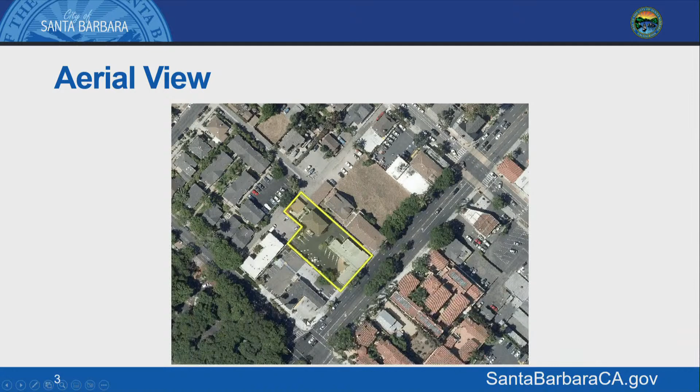You may recall that you had a concept review for the commuter lot proposal project. That's where these trees are located, and that's the commuter lot just recently. So this is a required concept review hearing. It's required because it is a rental housing project proposed under the average unit size density, or AUD, incentive program, and in the priority housing overlay area. It does not require any other discretionary approval by the Planning Commission, and it is on a lot that's greater than 15,000 square feet. The purpose of the hearing today is for the Planning Commission to provide comments and recommendations to the Historic Landmarks Commission regarding the proposed design and consistency with the general plan.

So the proposed project is using the AUD incentive program and also the state density bonus law provisions. Just a summary of the project: it would include relocating the existing residential building. Currently a triplex, it would be converted back to a duplex, so there'll be two 3-bedroom units as part of that relocated building. And then the construction of a new 4-story, 35-unit residential building with 4 studios, 19 one-bedroom units, and 12 two-bedroom units, and some low-income and moderate-income units as well, which we'll go over shortly.

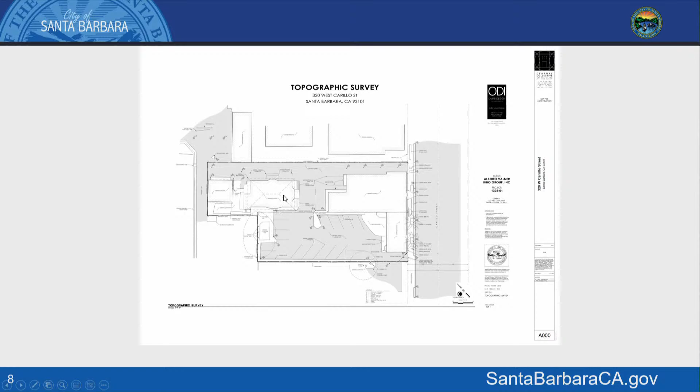Here is a survey of the existing project site. This is Carrillo Street on the right, the existing building to be removed in the front of the site. And right here is the existing residential building to be relocated to the front of the site.

Here is the proposed site plan on the left. It shows the structure of merit, historic resource here on this corner, some open space area, and then the 4-story building with a courtyard in between. It's one building, so you can go back and forth between these two areas, but there is an open space below.

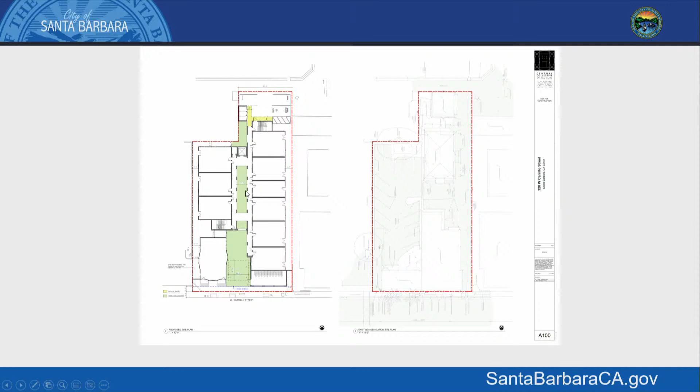So here are the floor plans. On the right is the ground level, showing in the front a bike parking storage room, and then the units. Along the back are 3 parking spaces and a trash enclosure.

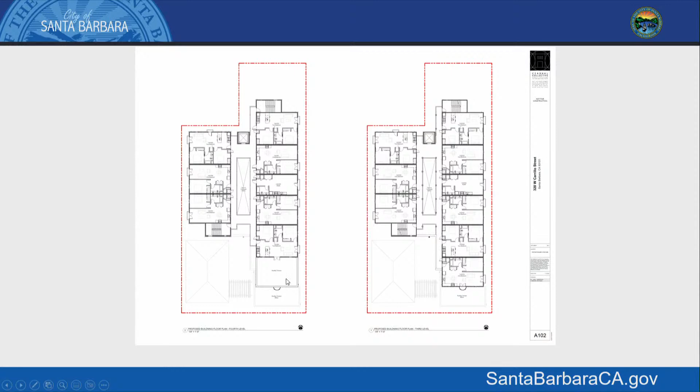To the left here is the second level, showing the residential units. Third level to the right, additional units, set back a little bit. There's a terrace here above the bike storage area. And then to the left, the 4th level, again another roof deck terrace area right here, and then the units behind.

Here are the elevations on the top, showing the proposed elevation looking from Carrillo Street. It shows the structure of merit located here on the left, and the new building to the right and beyond.

The proposed height is over 45 feet. It's 46 feet 10 and a half inches, so over the required height. Rather than asking for a height exemption request from you today, the applicant is using one of their incentives or concessions to request relief from the height requirement.

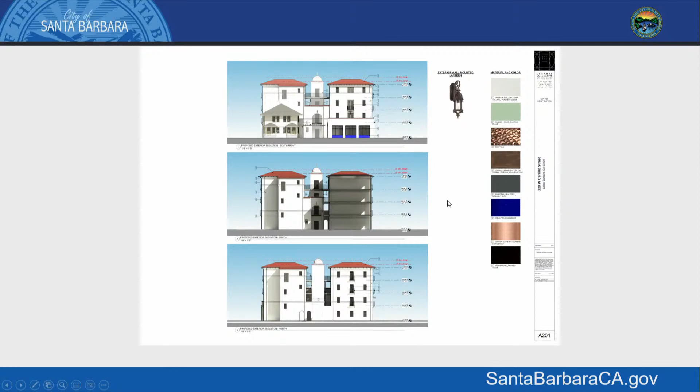Some additional elevations. The east side, so this would be looking from the downtown area towards the building, and then down below, looking from the freeway section to the project site.

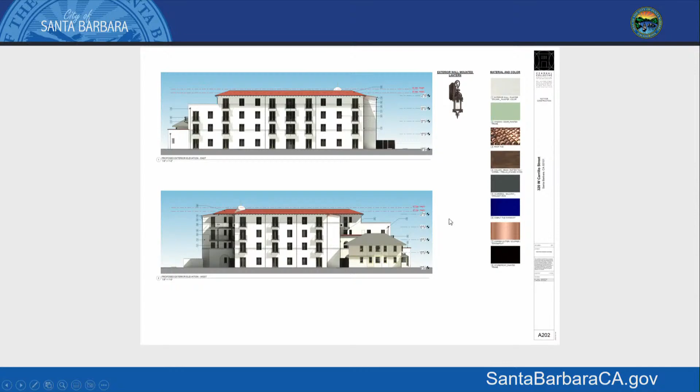The proposed landscape plan showing the courtyard and proposed plantings. There will be the removal of a few trees in the back of the site, but mostly lots of new plantings proposed.

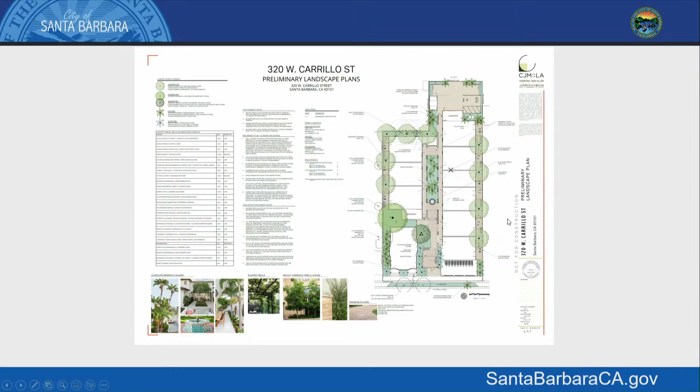Design review is required by the HLC. The project did go to the commission, and the commission stated that they appreciated the design of the new building, and they did support the height of over 45 feet. They suggested restudying some of the elements of the project to reduce the visual impact of the overall mass of the project.

Our architectural historian prepared a memo that was presented to the HLC, and the HLC concurred with the conclusion that the project meets the Secretary of the Interior standards, that the project will not have a negative impact on the historic building or the streetscape, and that it will restore historic integrity to the building by moving it to where it once was along West Carrillo Street. The existing residential building, which is in the back, had previously been located right up at the street, so it's being moved back to that original location.

Regarding zoning ordinance consistency for parking, it is exempt from providing parking under Assembly Bill 2097, although the project does include 3 parking spaces in the rear.

In regard to density, as I said, it's an AUD project and in the priority housing overlay area, so the maximum density is 63 dwelling units per acre, and that equals 25 units. The maximum average unit size is required to be 811 square feet, and the proposed for this project meets that by being 766 square feet.

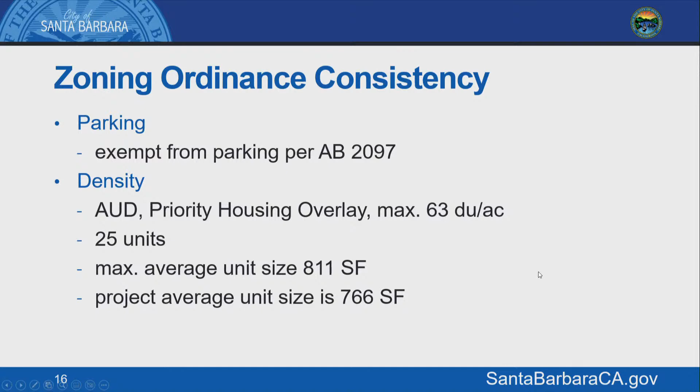The project also is taking advantage of state density bonus law. When we look at that, we determine what the base density is under that, and in this case it's 26 units. The project is providing 12% of those 26 units to be low-income units. That would be 1 studio unit and 3 one-bedroom units. 12% is 4 of the 26. So because they are providing that number, 12%, they're entitled to a density bonus of 38.75%, and that equates to 11 additional units. So they have a total of 37 residential units proposed.

They're also required to meet the inclusionary housing ordinance requirements by providing at least 10% of the units as moderate income units, and that would be 3 of the 26. You count just the original units, not the density bonus units. So 3 of the 26 would be moderate income - that would be 1 one-bedroom unit and 2 two-bedroom units.

As part of the state density bonus law, the applicant is allowed to seek relief from development standards. In this case, as proposed currently, they would have no setback for the buildings, so that would be one of the concessions they're asking for. Also, the building height being just over 45 feet, and also not providing the 15% of the lot area as open yard. They are close at 12%, but do not meet the 15%.

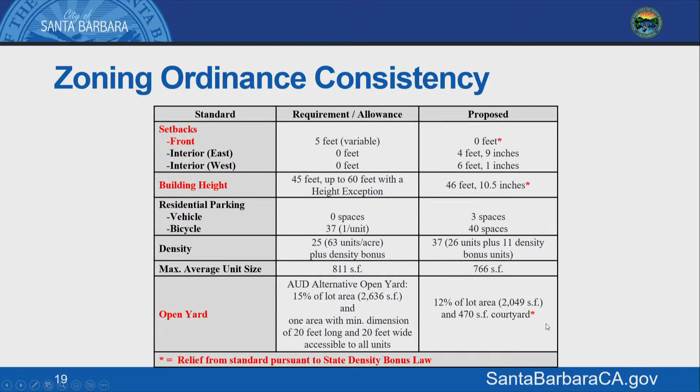In regard to public improvements, the project as currently designed does meet the current requirements by dedicating 5 feet to increase the size of the sidewalk. Over here to the left shows this line - they would dedicate this area for sidewalk, and then this would be the new property line. The proposed project is right at that property line, so there would be 0 setback, which is why I stated previously that they would be asking for relief from that 5-foot variable setback.

The pedestrian master plan will be created and put into the ordinance to have this as a requirement for projects where it isn't currently. So if this project were to meet the requirement of the pedestrian master plan, they would have to dedicate an additional 4 feet - that's where this pink line at the top would be.

If they were to ask for a waiver, transportation planning is not supportive of a waiver of this under state density bonus law, because they've determined that this would be more of a public safety issue and aren't supportive of that. In that case, this would have to be redesigned.

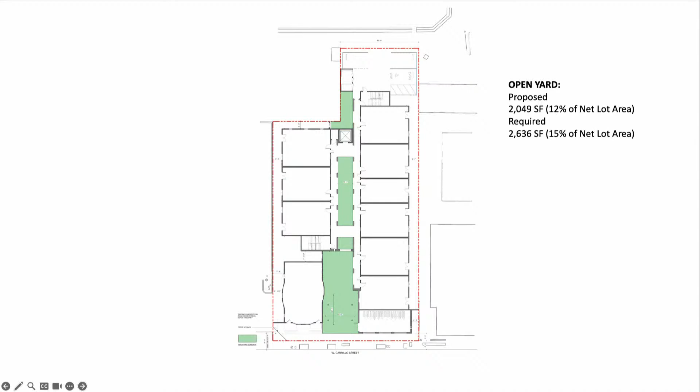We are a little short on the open yard area, and that's important, really primarily because we can't provide the private outdoor open space associated with the open yard requirements because the balconies just become too big, frankly. The landscape plan—I'll be happy to answer questions about this. We do have a large sycamore tree that we're planting here that will create that transition between the historic building and the new buildings and also mitigate the mass. The trees along the perimeter are also an important part of mitigating the mass of the 4 stories. Courtney Jane Miller is our landscape architect.

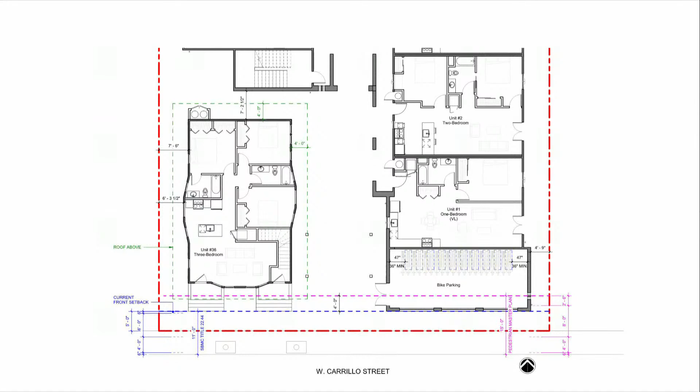Obviously, at this point, there are many buildings along Carrillo that are right at that red line, but nevertheless it's important to have future projects comply. But if there's a way that the steps can somehow encroach, that will help us. Otherwise, frankly, what we would have to do is remove or take a whole stack of 2-bedroom units and turn them into either 1-bedroom or studio units, which is our other option on this. I can explain that further if it doesn't make sense.

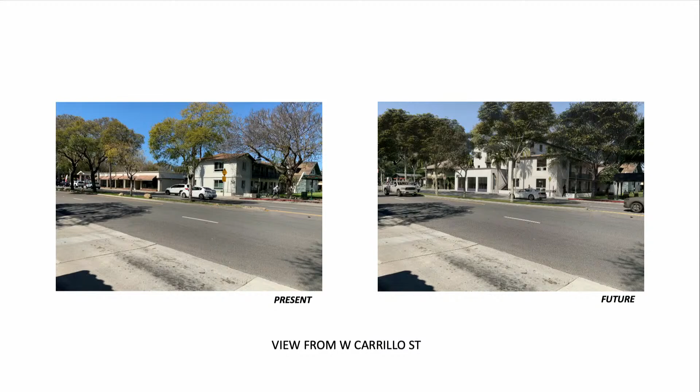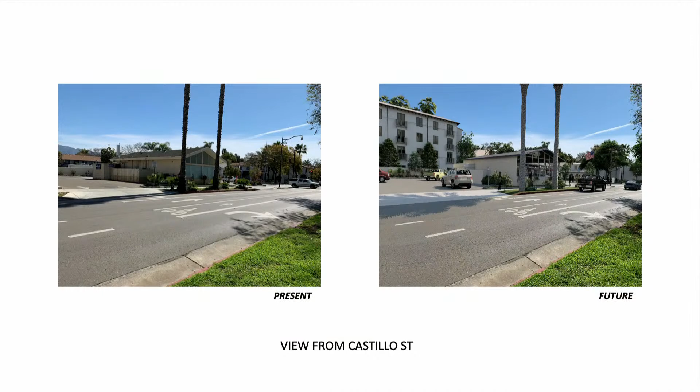So I thought I'd jump into the views. These are our photo sims that we've done of the existing, on the left, and the proposed, on the right. This is across the street, kind of where El Carrillo is. This is looking from the intersection of Castillo and Carrillo back. This is what's on the cover sheet, to give a sense of the context there. And then along Castillo next to the station, and finally from the alleyway looking back to the west at the proposed project.

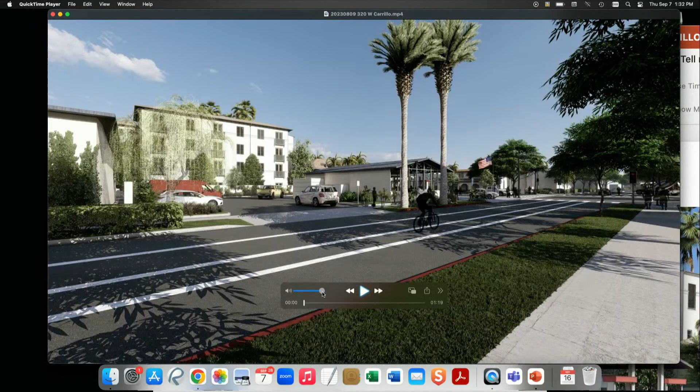And then I have a little video. HLC asked us to demonstrate that story poles would not be necessary, so we've prepared this video in hopes... there we go, to give a good sense of the neighborhood and the context for the massing. You've heard me before complain about story poles being a fairly ridiculous expense, and I'm hoping we don't have to do them on this, but ultimately that will be up to Historic Landmarks Commission, and you all may want to weigh in on that. But this just gives a good moving view of the context of this building in the neighborhood. I'm sorry, I don't have music to accompany it.

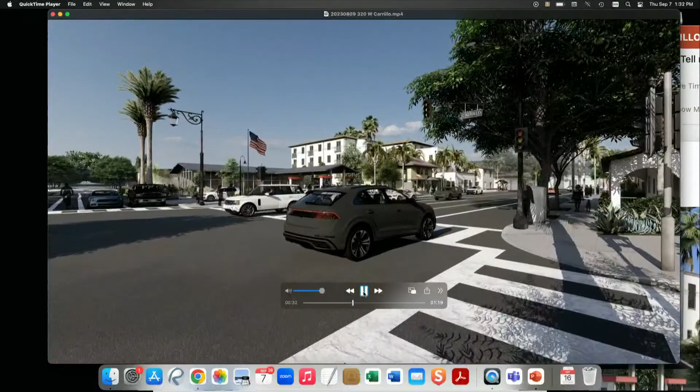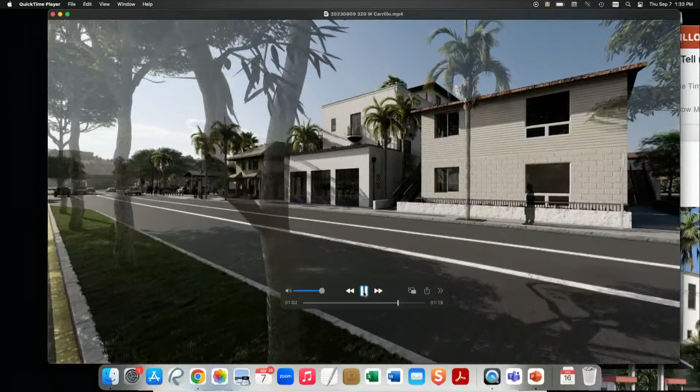So you can see the historic Bates House forward, and I think that's one of the great things about this project, bringing that building back onto Carrillo where it was originally, because it was moved back in the 50s to the back of the lot. You can see it in relationship also to the Craviota property to the east. And then we swing around here to look back at the El Carrillo project, which is predominantly, or is all, 2 stories at the street but 3 stories in behind.

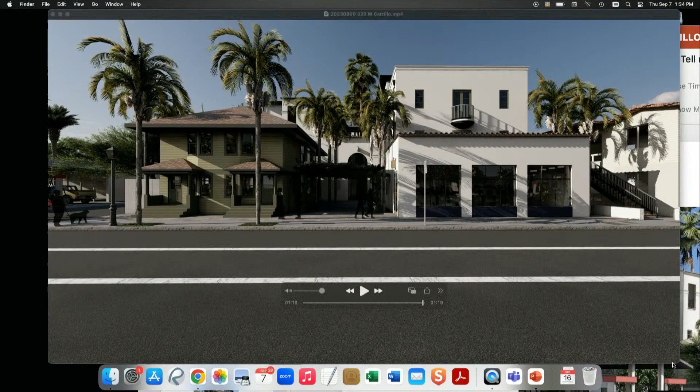And I think that is that. So let's go back. If I can find myself, you really may need your help. Let's see, here it is. Can't seem to get back to the slideshow. She's gonna count this against me in terms of time, you know. Yeah, I know. Let's try and shrink this. Let's see if we can shrink that. There we go.

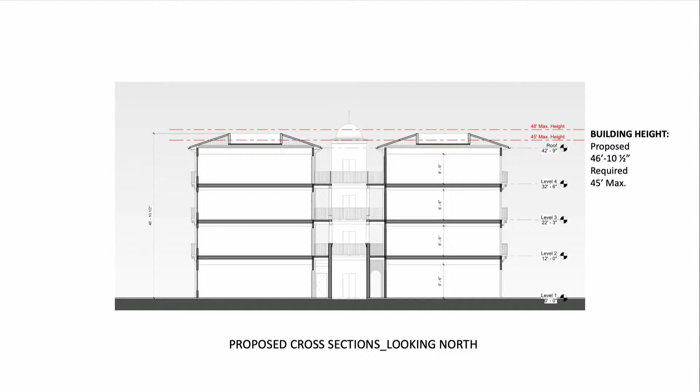Kathy's already shown you these. The section through the building really illustrates that the lower line is the 45-foot max line. You've also heard me before make the case for adequate ceilings in these units. So this is what the ceiling condition is, and that's what we're trying to preserve in the case of these small units. I believe that ceiling height is very important, and I believe that ultimately this height difference of 1.5 feet or whatever you really are never going to perceive from a practical standpoint.

Again, the elevations, I'll go through those quickly if you want to see them more. This is kind of an interior view of the courtyard space, and then it's mirrored on the other side with the historic building. This just gives you a sense of the studios, the 4 studios. The 1 bedrooms are in blue, and the sort of pink lavender, whatever color that is, are on the ends. That's the count you already saw, and in a little more detail, this is the typical unit.

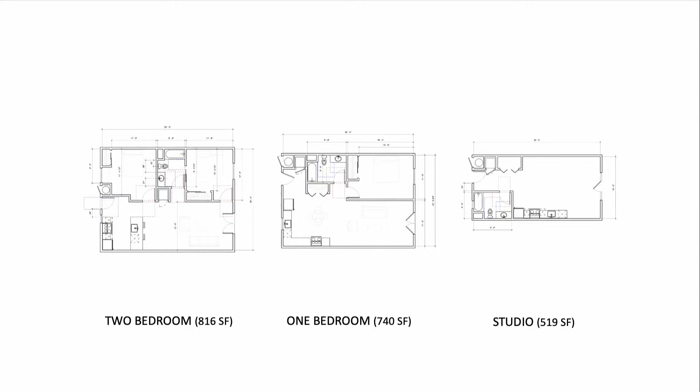I'll tell you that with accessibility laws the way they are now, it's pretty hard to get a unit much smaller than that studio of 519 square feet, but these are clearly workforce units. And then that's the 3-bedroom configuration of the relocated Victorian, and those are existing photos that I won't bother you with.

So I think the other thing I wanted to point out, as far as the site is concerned and the parking, we did feel that Alberto Vollner, our client, has a number of apartment projects, and the move-in, move-out is really probably one of the most important aspects of apartments like this, so that parking area is really essential for tenants to be able to move in and move out.

It's not really meant to provide parking for tenants, but it obviously provides some little extra over and above what AB 2097 would allow, and I'll reserve whatever time I have and be happy to answer questions.

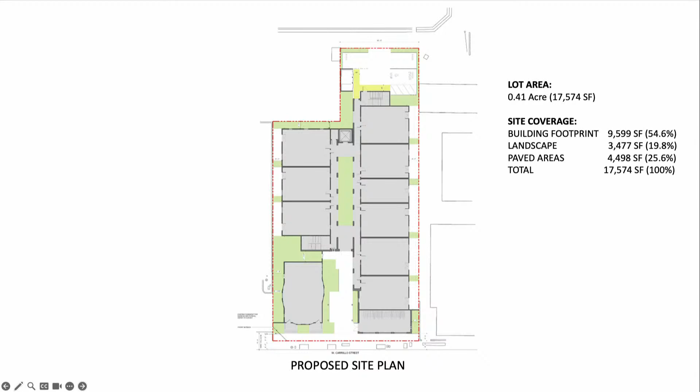My concern is basically the green space at the very top of the drawing, which defines your property boundary and that area that might sometimes become an impediment to larger vehicles and multiple vehicles being put in that area. I'm not sure how much we really gain by doing that, but that's my concern. Yeah, certainly that is an option. HLC can waive that landscaping along that parking area, I believe, so we might want to at least open it up and make it more maneuverable. Okay, this is the question I had for you.

Staff, could you walk us through this whole discussion about the master plan for the street, what that cross-section looks like, or what would happen if... My big concern is how many buildings currently exist that wouldn't comply with the master plan if and when it's adopted? Could you explain, I wasn't quite sure when it kicks in, and what exceptions there might be, and how that all works, because some commenters noted there isn't a bike lane, which is a concern in that area. Will there be a bike lane in that master plan?

Did it work? So first of all, it's my understanding that this new ordinance will take effect sometime in the fall. I don't know exactly when, and I don't know if there's a 30-day time lapse or not, but I was told it would take effect sometime in the fall.

I can't answer your questions about other projects, and I haven't really looked at how other projects in this area currently meet it. I know there's another project across the street that has the same situation where they'll need to comply with this, I think on the corner of maybe Bath, not sure. It's not my project, but another planner's working on it, so that would be across Carrillo on the other side.

So I'm not sure what other questions you have. Well, I was just trying to understand what the end game is as to what we're trying to accomplish on this very busy corridor street that we have.

And if the improvement plan is to get bike lanes on there, which I presume might be part of this, I would think if that's something important for the city long-term, we should hold the line on it. And unfortunately, in this case, it means Brian might have to make some modifications to the project to do so.

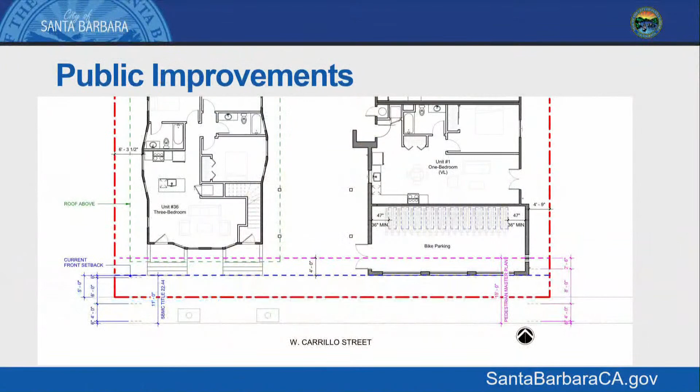Well, the reason for this area to be dedicated more is for sidewalk purposes. So widening the sidewalk, is that the goal? Widening the sidewalk, and then there's a frontage zone as well - I think 2 feet 6 inches - which could be on the property line or on the private property, but it's to increase the sidewalk width. So would having stairs right in the middle of a sidewalk defeat that purpose?

Yeah, well this is actually a perfect introduction to the series of questions I have having to do with the setback situation. So kind of leading back to the previous planning commissioner's comments with regard to the pedestrian master plan, and kind of understanding what this block and continuing blocks above and below this site look like.

If we don't have some sort of mapping system that shows which projects are already in the encroachment and which ones are already providing enough space for this future pedestrian master plan goal, it's really hard for us to know whether or not to give an exception or a concession, because if we want to be supportive, we need to understand how this affects what the overall city looks like in this area. It's really hard for us to hypothesize - if we are really strict and support this pedestrian master plan, but it's the only property in the entire vicinity that has the amount of space dedicated to this future sidewalk.

Yep, I have, and my problem is that if you see the plan on the left, which is the fourth floor, that's the deck you're talking about, correct? If I extended that corridor to that deck, it basically becomes a dead-end corridor, and I would have to provide another stair from that deck, and I just don't know where I would put that.

Ultimately we did talk to our client about this, and I think his concern - which is really legitimate - is that as soon as that became a public outdoor deck, the poor resident underneath it becomes a problem for them, a public access point.

Could I get back to this whole question of the front yard? Let me switch back to the landscape plan, because I want to make sure we're all clear that with the change of design to move that back to the pedestrian master plan setback of 15 feet, unlike really anywhere else on Carrillo now, we will have the parkway and the 6-foot sidewalk, and everything will be clear of that. The pedestrian master plan allows for the furthest back 2.5 feet of that 15-foot setback - you can encroach 2.5 feet. That's considered the frontage zone. Thank you.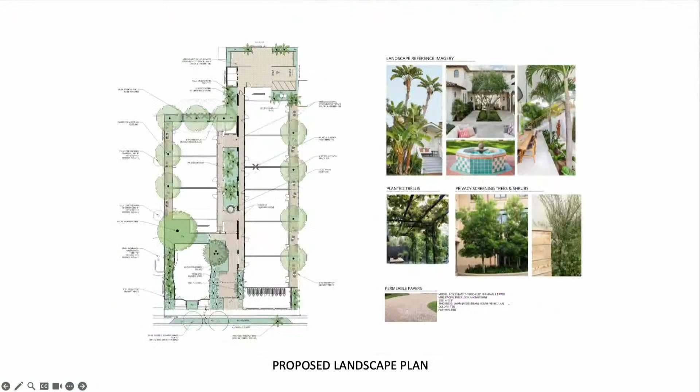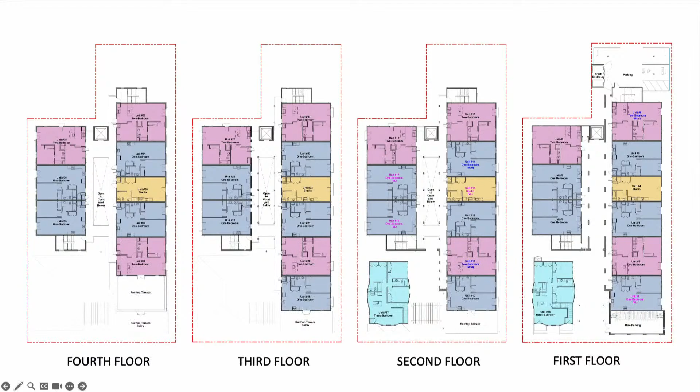I appreciate that you talked us through that further. My last question is back to you, Mr. Cornell. We heard our public speaker, Mr. Johnson, talk about this builder's remedy type work. Is that something you're familiar with? I've actually kind of tried to stay away from doing any builder's remedy projects. As I understand it, I would either have to provide 20% of the units as low income or 100% as moderate, and I think that's what the speaker was talking about, having the 100% moderate option. But no, prior to this coming up, I had never really discussed the concept with the client.

I'm just going to put this out here into the universe, but maybe you would consider having that conversation and see if it might be of interest for your team. I'll leave it at that. I think it's just an interesting topic.

Okay, I do have Commissioner Lodge. Do you have a follow-up question at this time? Yes, a couple of questions have come up.

In your presentation, Ms. Kennedy, I think you said there are no windows on the courtyard ends of the units. Is that correct, or did I misspeak? Yeah, there are windows—I can show you, I can switch. You can even see it right above the kitchen sink. So this is the one courtyard—yeah, that's the courtyard elevation looking west, and then that's the courtyard. So you can see there are the front doors to the units, which are glass, and also windows facing into that courtyard.

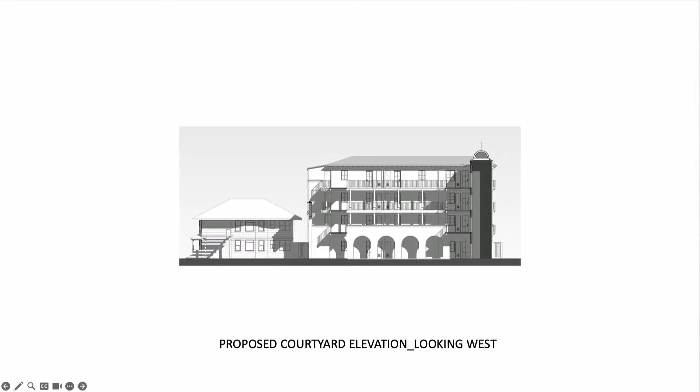Okay, because if that were true, I would have suggested that there be glass in the doors so that some light comes in from the other end. And then my other—where did my other question go? Well, I guess these are actually just comments.